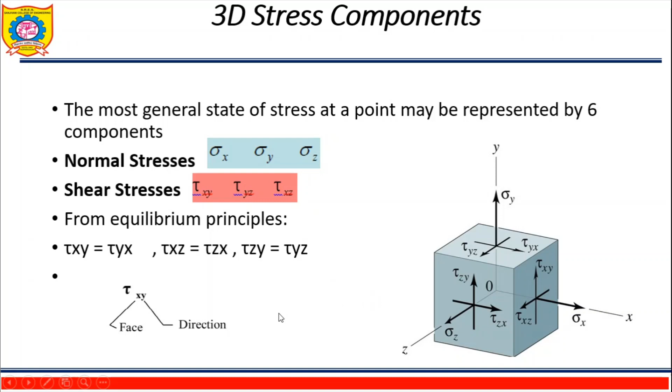Then when we apply the load along this z direction, sigma z is the normal stress. Then along the x direction, tau xz is the shear stress, and tau yz is the shear stress along the y direction. There are two stresses: one is the normal stress and the other is the shear stress. The subscript identifies the face on which the normal stress acts. Tension is positive and compression is negative.

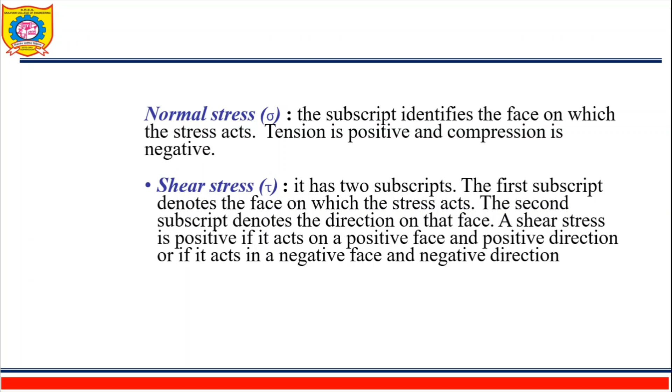And the shear stress has two subscripts. The first subscript denotes the face on which the stress acts, and the second subscript denotes the direction on that face. A shear stress is positive if it acts on the positive face in the positive direction, or if it acts on a negative face in the negative direction.

Then for static equilibrium, tau xy will be equal to tau yx, tau xz will be equal to tau zx, and tau zy equal to tau yz, resulting in 6 independent scalar quantities. These 6 scalars can be arranged in a 3x3 matrix, and this will give the stress tensor. So we can write down the values: sigma x, sigma y, sigma z, and the remaining shear stresses.

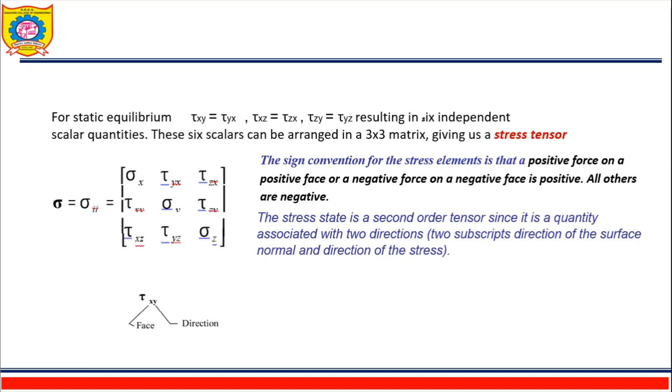The sign convention for the stress element is that a positive force on a positive face or a negative force on a negative face is positive. All others are negative. The stress state is a second order tensor since it is a quantity associated with 2 directions. The same state of stress is represented by a different set of components if the axes are rotated.

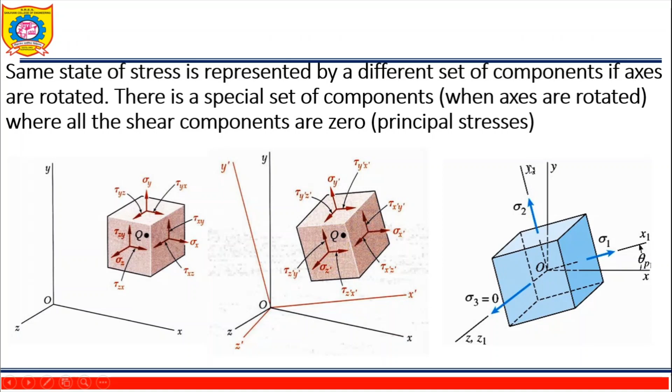There is a special set of components when axes are rotated, where all the shear components are 0. So those will be the principal stresses. So at one plane, we have to find out the value of the major principal stress and the minor principal stress. So sigma 1 and sigma 2 are the 2 principal stresses. One will be the maximum, another will be the minimum, and sigma 3 will be in between the sigma 1 and sigma 2 values.

A property of a symmetric tensor is that there exists an orthogonal set of axes 1, 2, 3, which are called principal axes, with respect to which the tensor elements are all 0 except on the diagonal. In matrix notation, the transformation is known as eigenvalues. The principal stresses are the new axis coordinate system. The angles between the old axis and the new axis are known as eigenvectors.

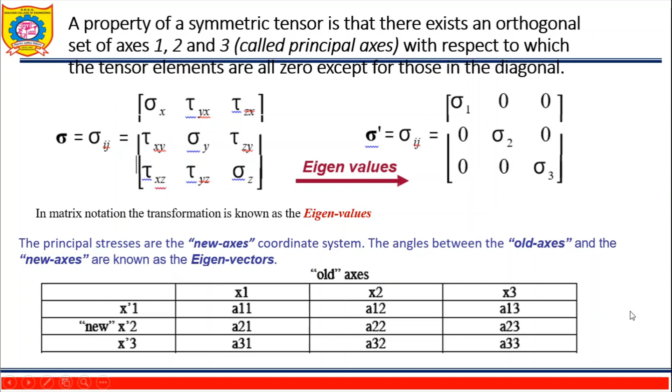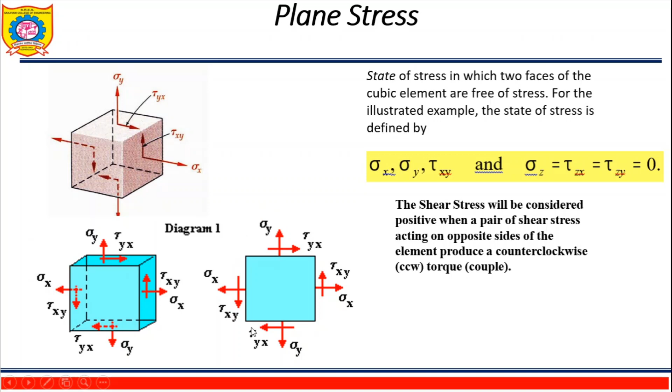Next is the plane stress: the state of stress in which two faces of the cubic element are free of stress. For the illustration example, the state of stress is defined where the shear stress will be zero. The shear stress will be considered positive when a pair of shear stresses acting on opposite sides of the element produce a counterclockwise torque. So this is one shear stress acting on this side, and when they are creating the anti-clockwise torque, it is considered a positive one.

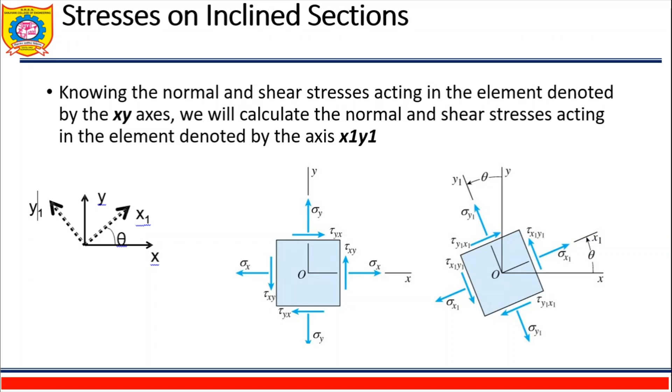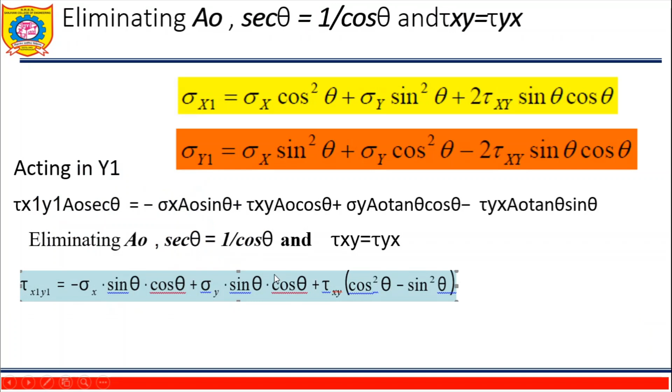Then the stresses on the inclined sections: knowing the normal and shear stresses acting in the element denoted by the xy axes, we will calculate the normal and shear stresses acting in the element denoted by axes x1 y1. Suppose that on this plane we have to find out the normal stress and the shear stress. So we can find the resultant value and then the transformation equations for plane stress.

Sigma x1 will be equal to (sigma x plus sigma y)/2 plus (sigma x minus sigma y)/2 cos 2 theta plus tau xy sin 2 theta. Sigma y1 is (sigma x plus sigma y)/2 minus (sigma x minus sigma y)/2 cos 2 theta minus tau xy sin 2 theta. And tau x1 y1 will be equal to minus (sigma x minus sigma y)/2 sin 2 theta plus tau xy cos 2 theta.

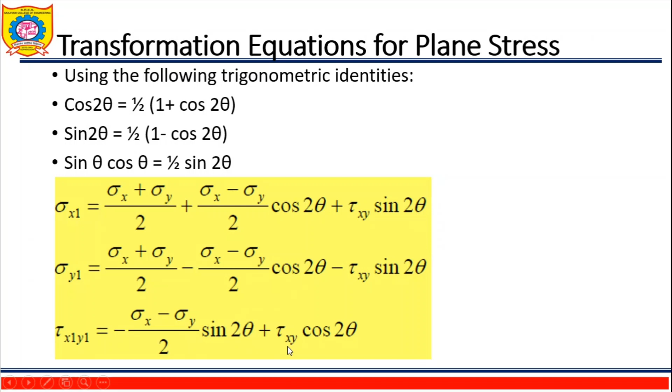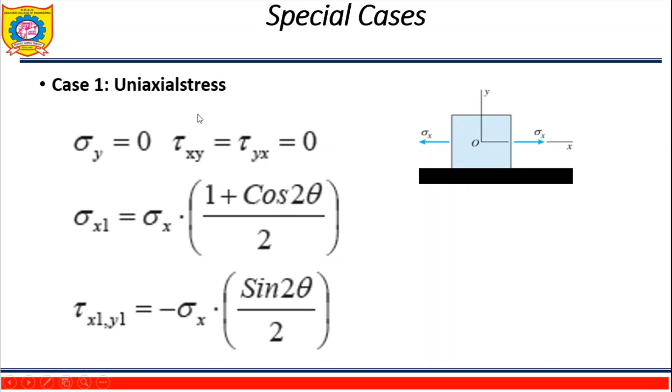So we'll see the cases. When we apply the load along only one direction, uniaxial stress, sigma y will be 0, and tau xy and tau yx will be 0. After that we can get the value of sigma x1 and tau x1 y1. Similarly, for pure shear, we have to put sigma x and sigma y equal to 0 in the transformation equation, and then we can find sigma x1 and tau x1 y1.

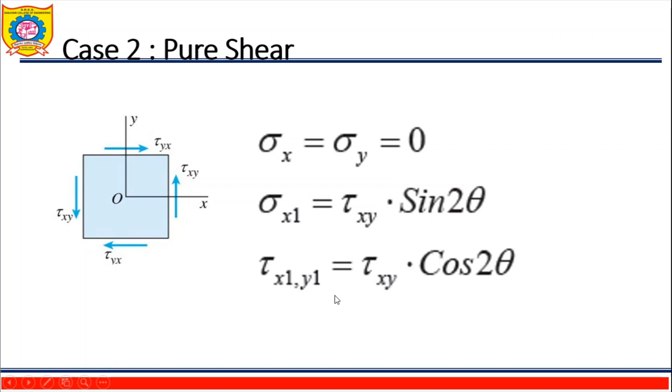Similarly, biaxial stress: when we apply the load along the two directions x and y, the third component tau xy is 0. So when you put tau xy equal to 0 in the stress transformation equation, you can get the sigma x1 and tau x1 y1 values.

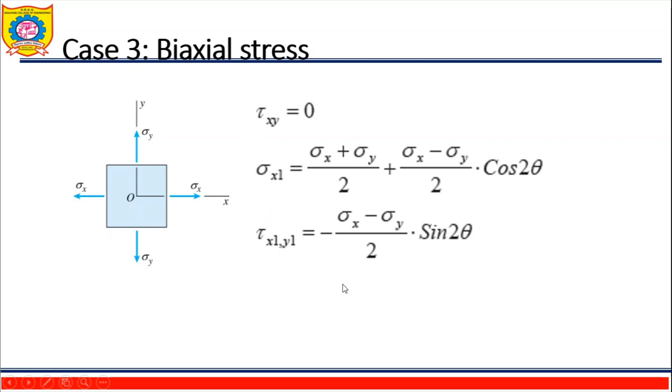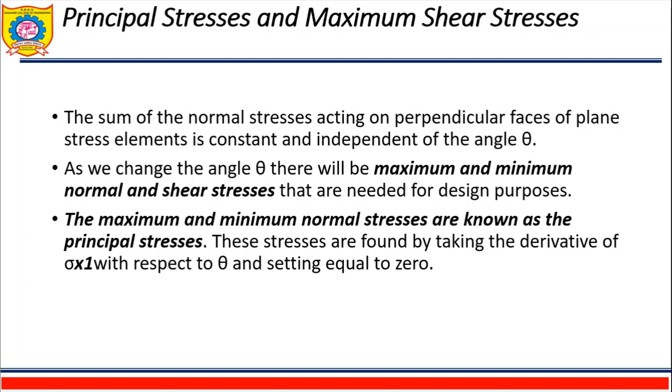Next is principal stresses and maximum shear stresses. The sum of the normal stresses acting on the perpendicular faces of plane stress elements is constant and independent of the angle theta. As we change the angle theta, there will be maximum and minimum normal and shear stresses that are needed for design purposes. The maximum and minimum normal stresses are known as the principal stresses. These are found by taking the derivative of sigma x1 with respect to theta and setting it equal to 0. So these are the principal stresses: one maximum and one minimum, major and minor.

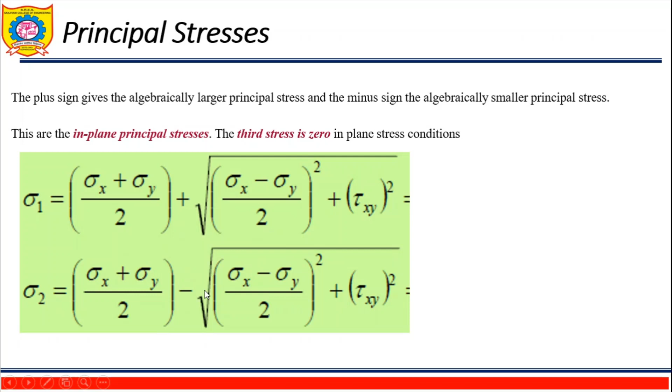Then we have to find the maximum shear stress. The angle for the maximum shear stress is obtained by taking the derivative of tau x1 y1 with respect to theta and setting it equal to 0. So we get tau x1 y1 equal to minus (sigma x minus sigma y)/2 sin 2 theta plus tau xy cos 2 theta. Similarly, we can find tan 2 theta p equal to tau xy upon (sigma x minus sigma y)/2.

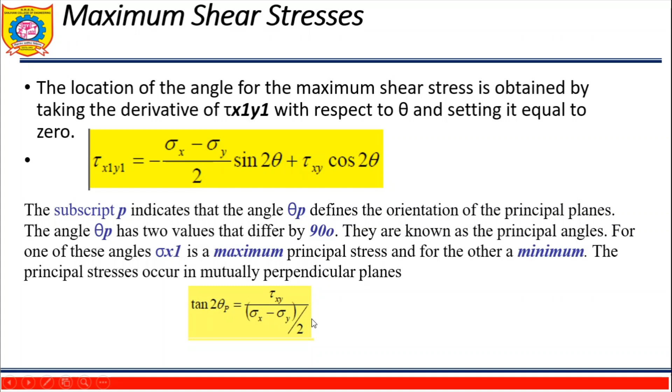The planes of maximum shear stress occur at 45 degrees to the principal planes. The plane of the maximum positive shear stress tau max is defined by the angle theta s1 for which the following equations apply. Tan 2 theta s will be equal to (sigma x minus sigma y)/2 over tau xy, which equals 1 upon tan 2 theta p. And tau max will be equal to the square root of ((sigma x minus sigma y)/2) squared plus tau xy squared.